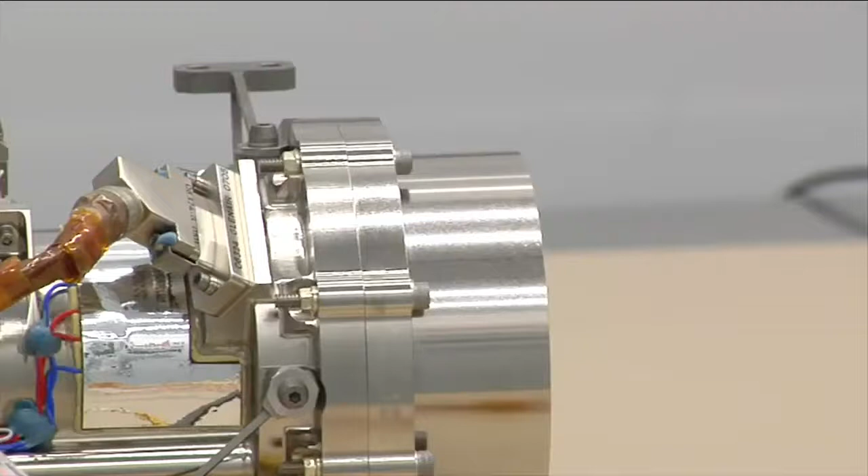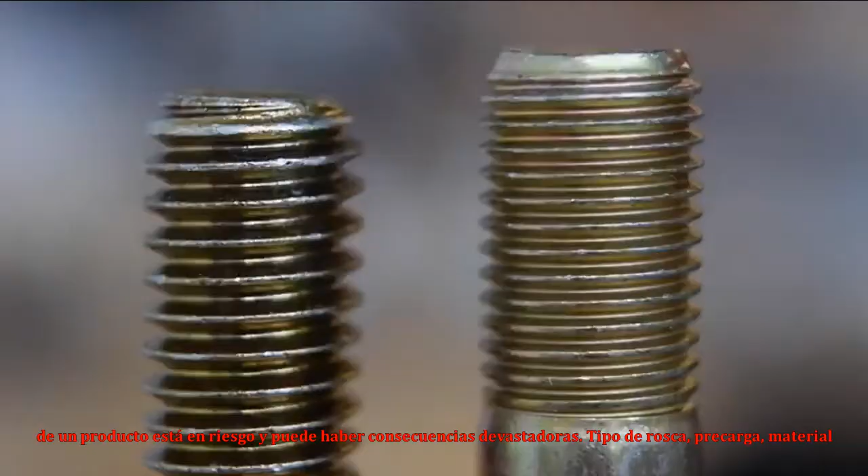Fasteners are some of the most important components in any machine, but they're often taken for granted. It's vital to correctly choose and use them, or else the mechanical integrity of a product is at risk, and there can be devastating consequences. Thread type, preload, material choice, coating spec, drive selection, and more all need to be understood and applied properly. In this video, we're going to go over all these fastener topics and many more, so that you know the nuts and bolts of nuts and bolts.

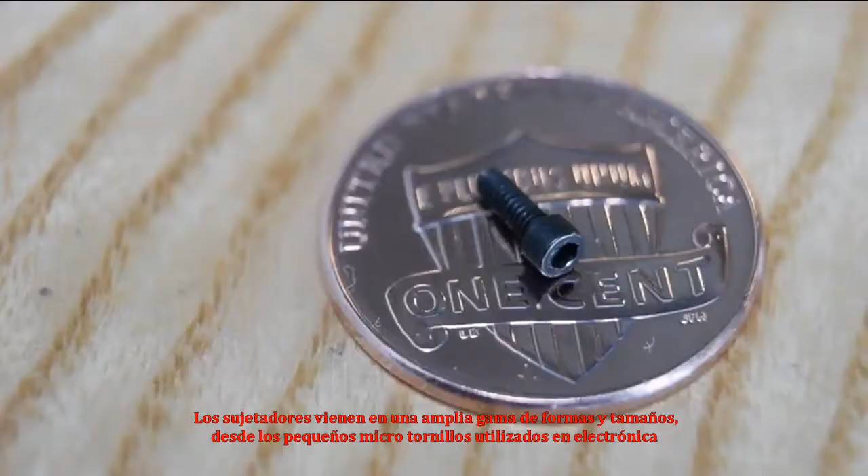Fasteners come in a wide range of shapes and sizes, from the tiny microscrews used in electronics to the large structural bolts that hold buildings together. The vast variety available can be a bit overwhelming, but we'll show you a few of the most common types and talk about where they're best used.

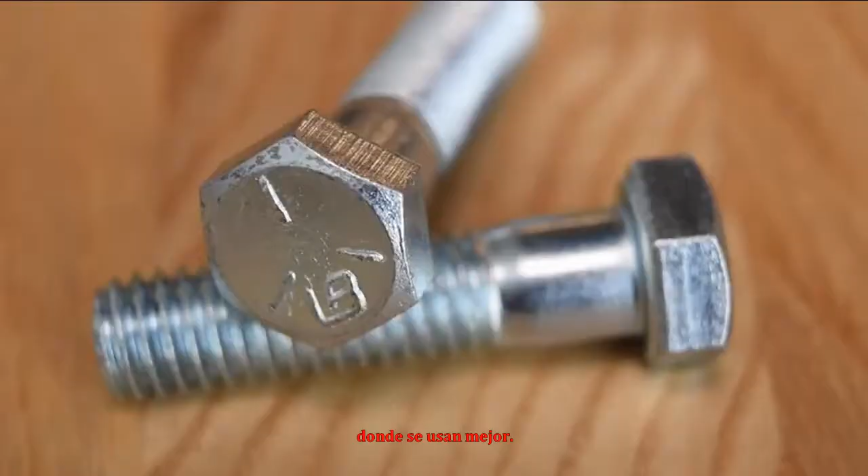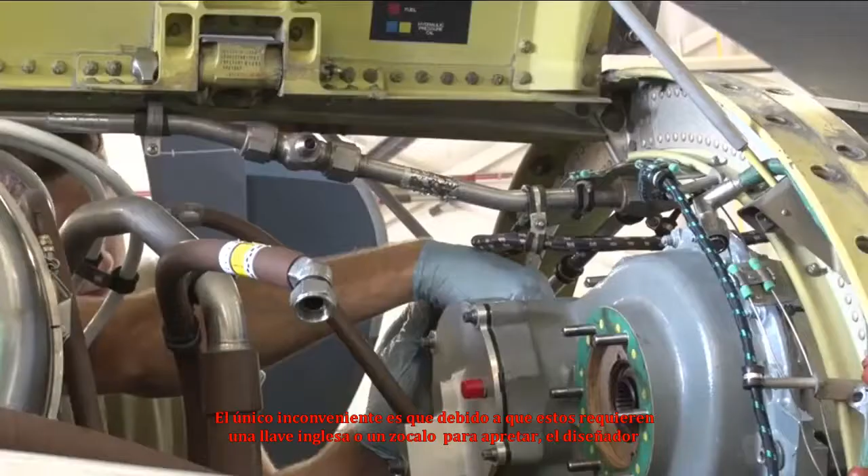These are hex head screws, which most people informally call bolts. Because they're cheap, strong, and easy to work with, they're probably the most common fasteners you'll encounter. The only trade-off is that because these require a wrench or socket to tighten, the designer has to leave a fair amount of room around the fastener to accommodate the tool. If you're designing with these, you can reference Machinery's Handbook for a helpful table on tool clearance requirements.

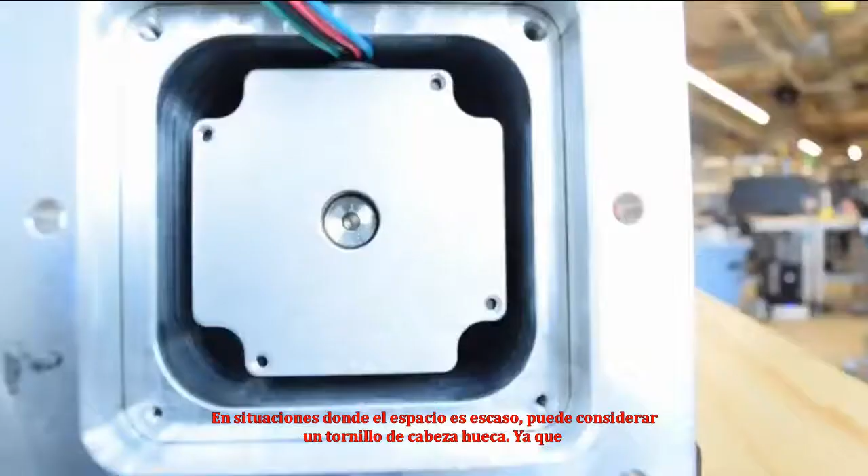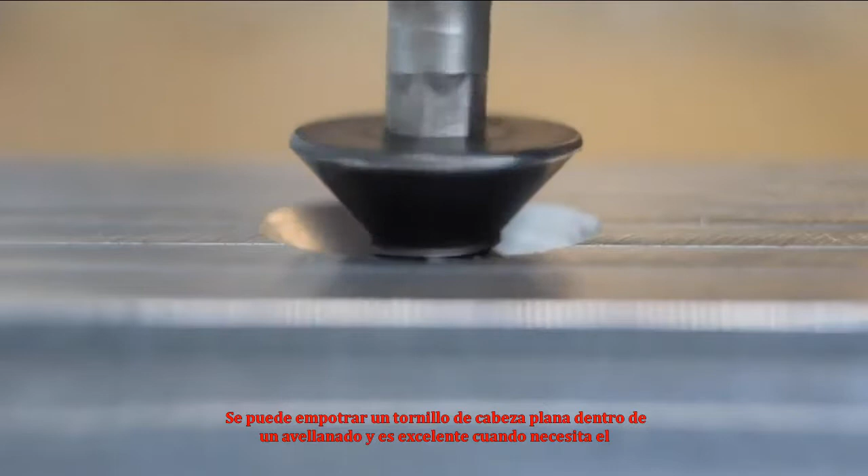In situations where space is at a premium, you might consider a socket head screw. Since they're driven from the top, you can place them in tight spots or bury them in a counterbore. Low head screws and button heads have a lower profile and are often used in electronics. A flat head screw can be recessed inside a countersink and is great when you need the head of the fastener to sit below the surface of thinner materials.

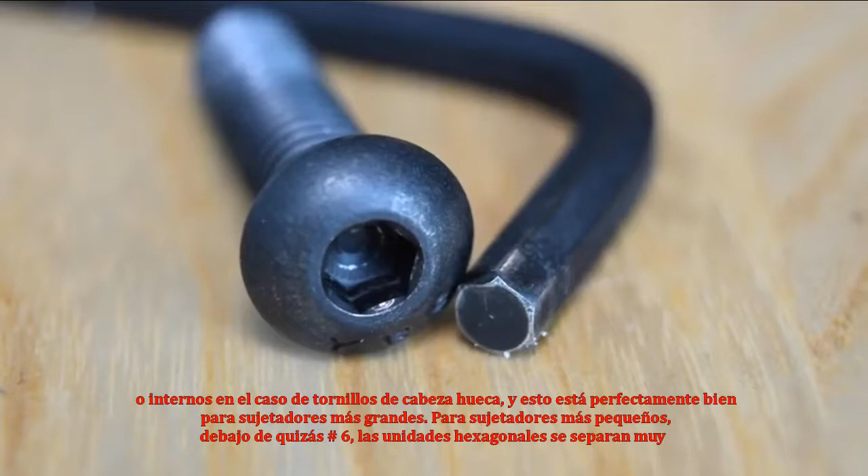Screws are most commonly sold with a hex drive, either external in the case of a hex head cap screw, or internal in the case of socket head cap screws, and this is perfectly fine for larger fasteners. But for smaller fasteners, below maybe a number 6, hex drives strip out very easily, and you should consider a more robust drive like Torx.

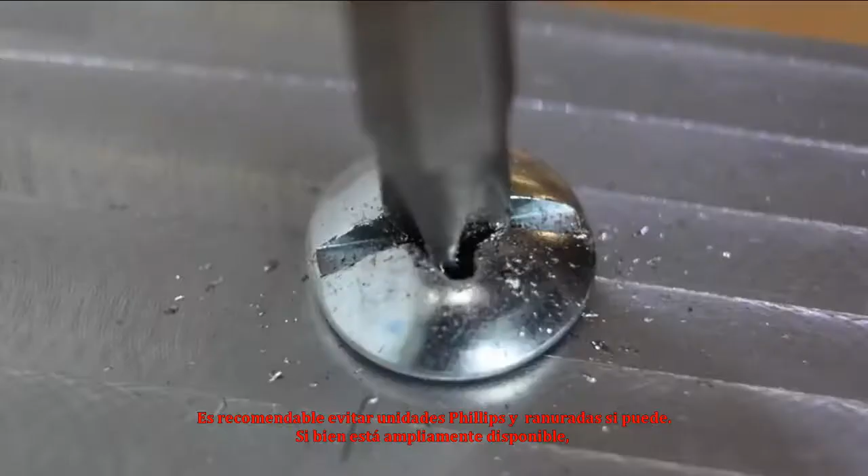High-strength nuts and screws are sometimes manufactured with an external 12-point drive, which offers more points of contact than the traditional 6-point hex. It's best to avoid Phillips and slotted drives if you can. While being widely available, they are subject to cam out and can strip easily. Even the construction industry is moving to Torx drive because of the many advantages. There's also a lot of really oddball drive types that were designed for very specific applications or to purposely be obscure. Unless your design fits into these categories, you should probably consider something more mainstream.

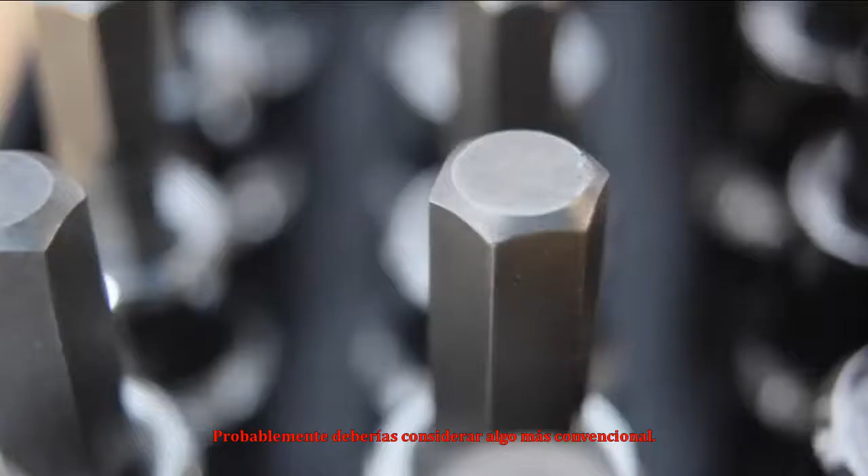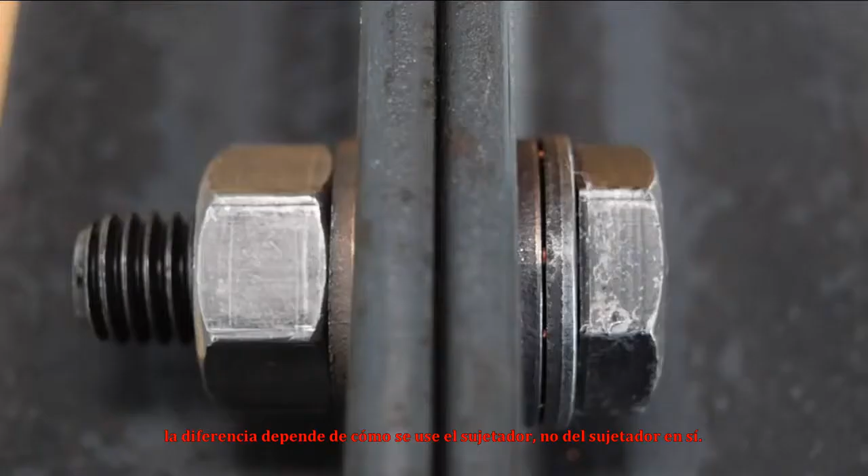You may be wondering what the difference is between a screw and a bolt. Technically, the difference depends on how the fastener is used, not the actual fastener itself. Bolts are used with through holes and are fastened with a nut. Screws are used in tapped holes. Screws have a design for assembly advantage since the technician only needs to use a single tool to fasten the joint.

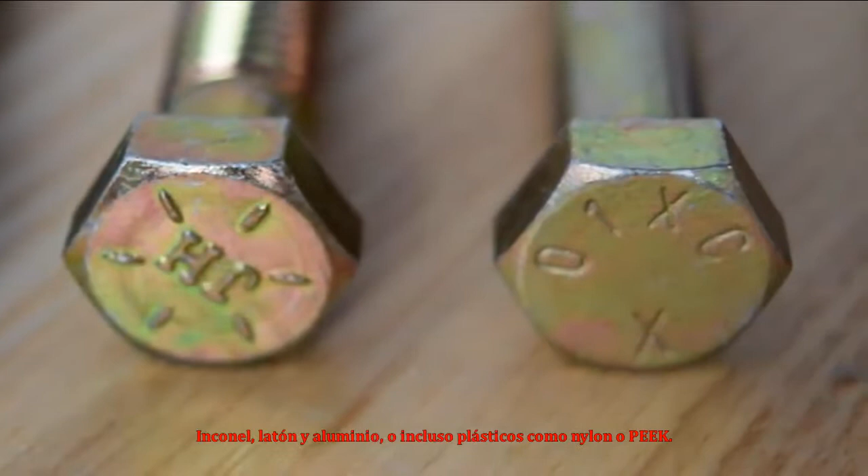Screws are most commonly made from either low carbon or alloy steel, but you will also find them made from stainless steel, titanium, Inconel, brass, and aluminum, or even plastics like nylon or PEEK. The primary considerations for selecting material is strength and corrosion resistance. The strongest fasteners are usually made from heat-treated alloy steel, but steel will corrode when exposed to moisture.

Coatings are commonly applied to alloy steel fasteners to make them more resistant to corrosion. Zinc plating is economical and is the most common coating on low and medium strength fasteners. It is sufficient for dry environments that receive only occasional contact with moisture. Grade 8 screws usually receive a yellowish chromate conversion coating, which has slightly better corrosion resistance than electroplated zinc.

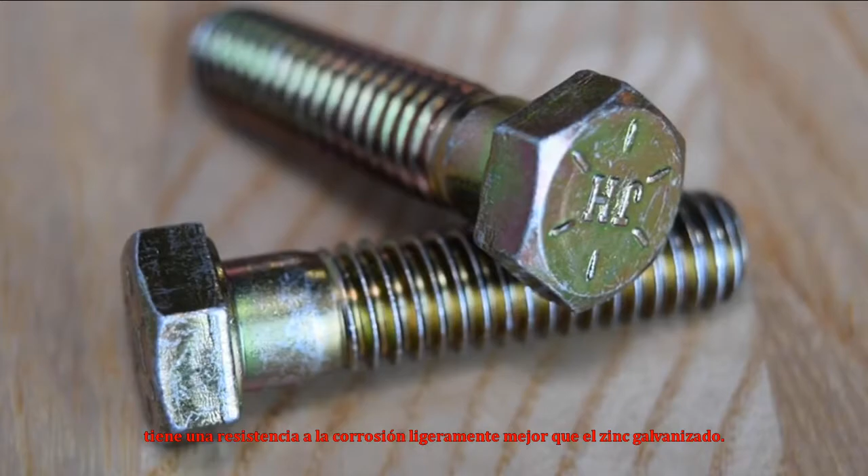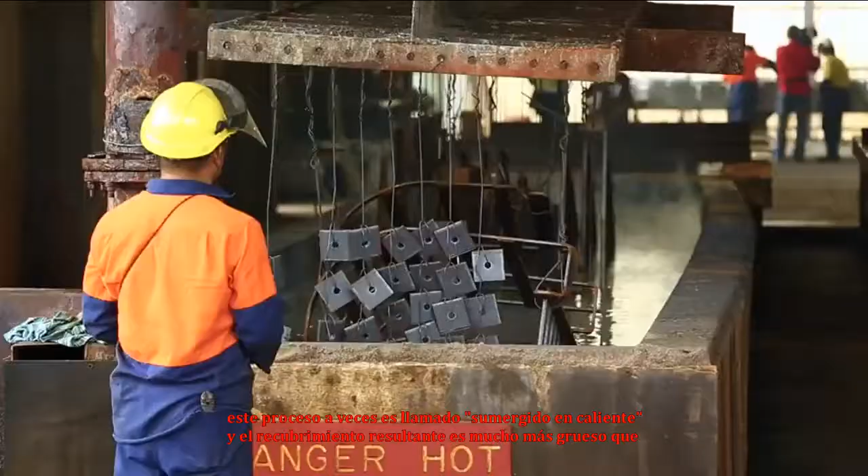Fasteners that will be exposed to the elements are often galvanized. This means that the raw bolt is dipped in a pot of molten zinc, which adheres to the base metal. This process is sometimes nicknamed hot dipped, and the resulting coating is much thicker than the electroplated zinc. Galvanized fasteners are typically acceptable for exterior installations.

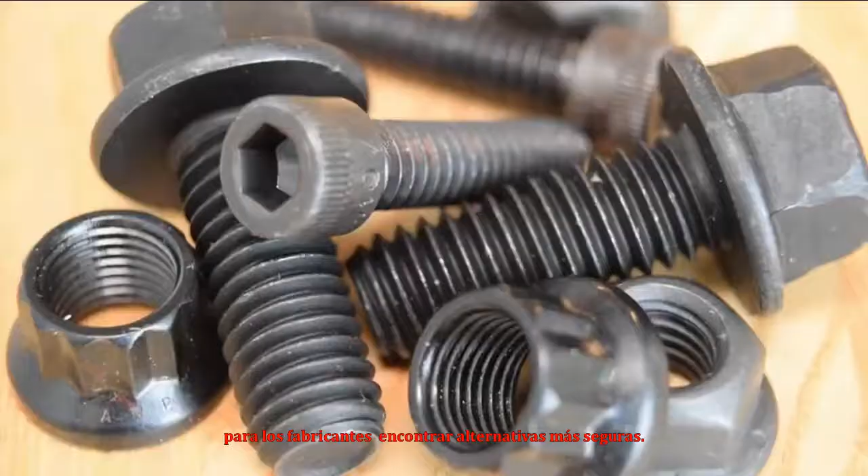Aerospace fasteners are usually plated with cadmium. This is a very effective coating, but cadmium is an extraordinarily dangerous material, and these hazards are compelling manufacturers to find safer alternatives. Some fasteners, particularly socket-head cap screws, are coated with black oxide, and while it looks nice, this doesn't significantly improve the corrosion resistance over bare steel.

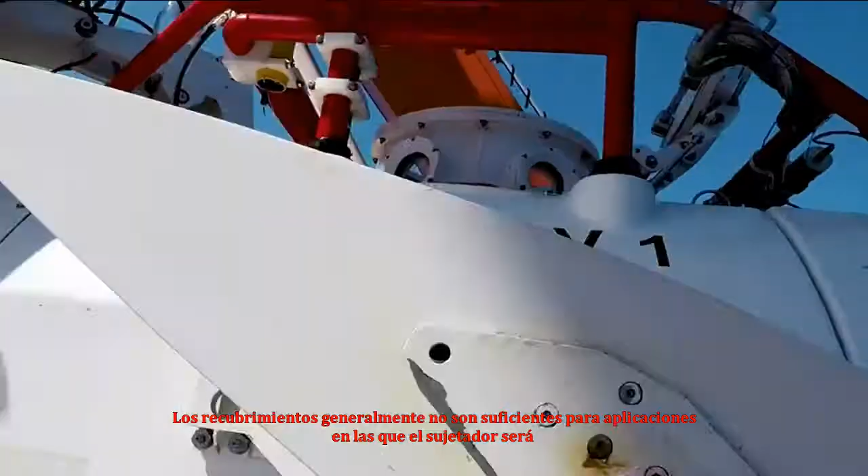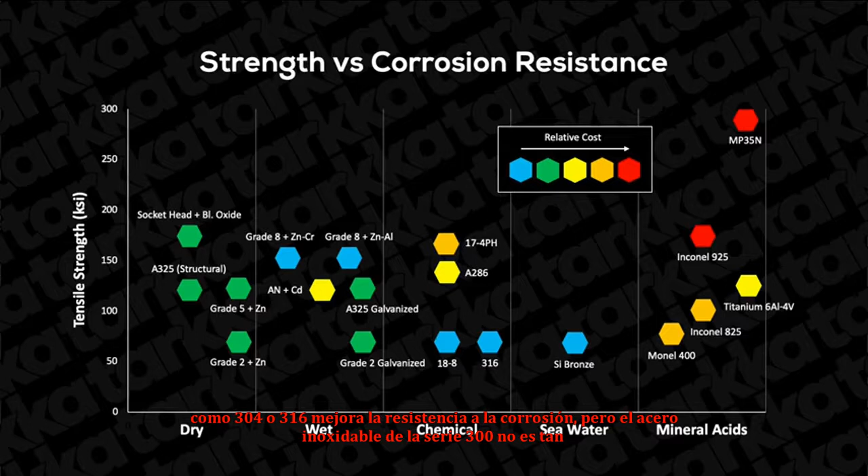Coatings are generally not sufficient for applications in which the fastener will be immersed for extended periods. Switching to a stainless steel fastener made from an alloy like 304 or 316 improves the corrosion resistance, but 300 series stainless is not nearly as strong as alloy steel. If you need both high strength and corrosion resistance, you may need to use a super alloy like A286 or 17-4PH. Nickel-based alloys like Inconel and Hastelloy are also used in the most demanding applications.

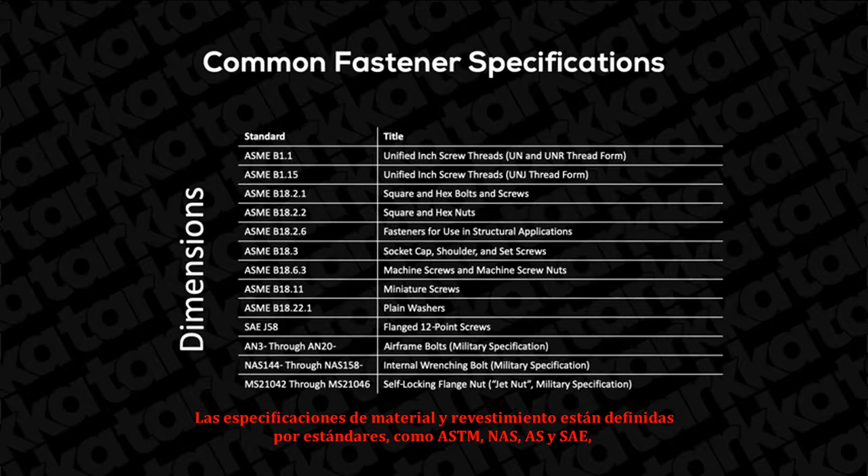Material and coating specifications are defined by standards, such as ASTM, NAS, AS, and SAE, or the former MIL and AN specs. Metric fasteners are defined by ISO or DIN specifications. Various grades of fasteners are sometimes defined by the standards, and for hex head screws, the grade is usually designated by marks on the heads. Metric fasteners use a system of numbers stamped into the head. In either case, the higher the grade, the higher the tensile strength of the fastener.

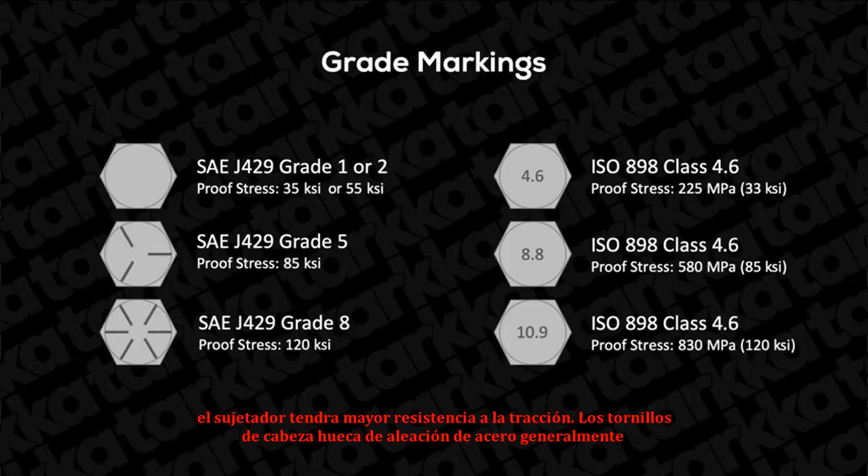Alloy steel socket-head cap screws generally have a strength similar to grade 8 bolts. It is important to ensure that the fasteners you are purchasing conform to the required specifications for your product or industry.

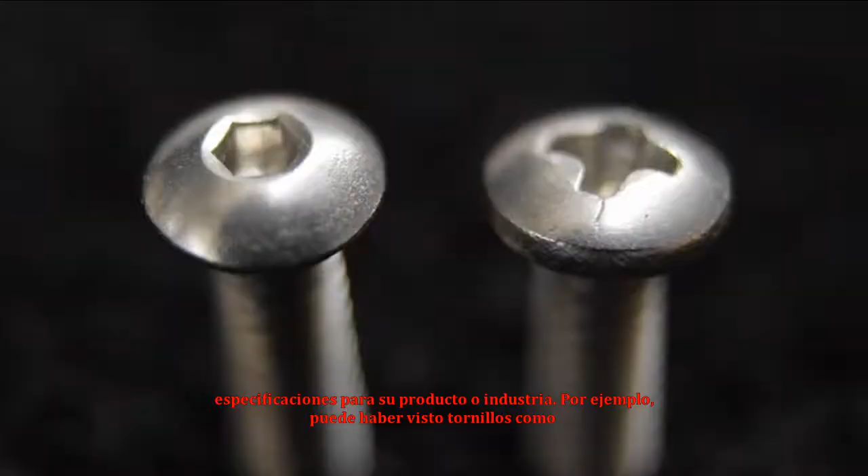For example, you may have seen screws like this at the hardware store, where they are typically labeled as panhead screws.

Dimensionally, they are very similar to buttonhead screws, and both are made from steel and zinc plated. However, the hardware store screws are made from soft carbon steel, while the buttonheads are made from heat-treated alloy steel per an ASTM specification and are over three times as strong. For some projects, hardware store fasteners are fine, but for critical applications, purchase fasteners from a company like McMaster-Carr that lists exactly what specifications they conform to.

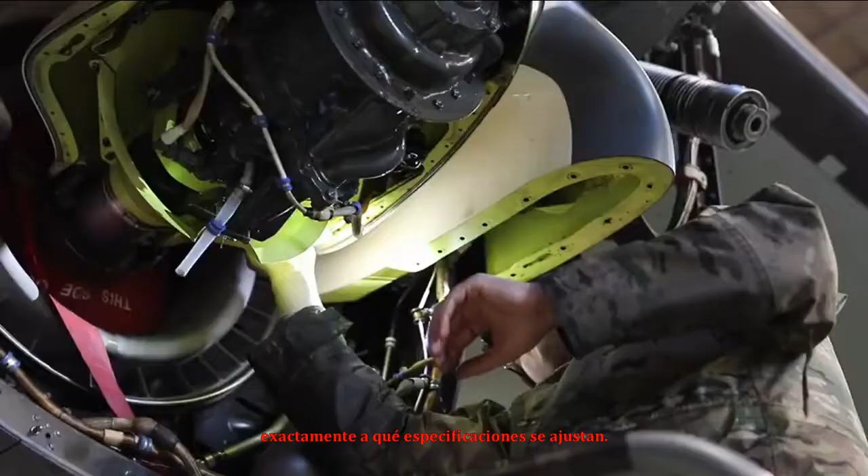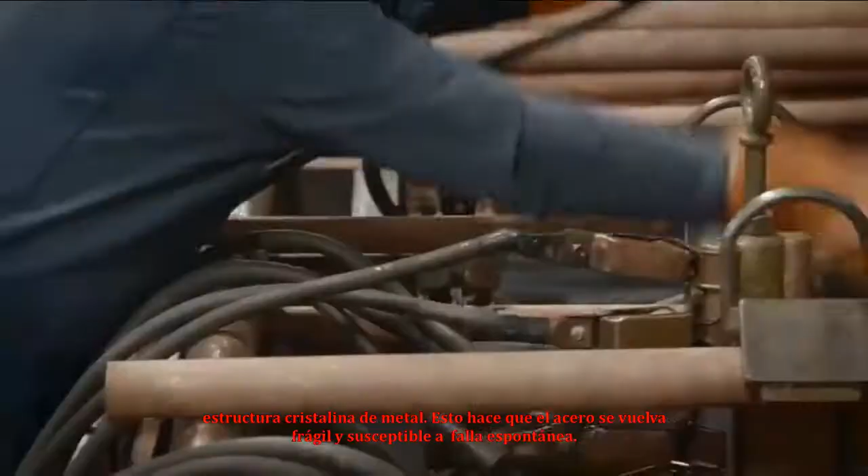Fastener materials and coatings is a hugely important area, especially in industries like aerospace, marine, and energy. A particular point of concern is hydrogen embrittlement. During the plating process, hydrogen is often produced, which can become trapped inside the metal's crystal structure. This causes the steel to become brittle and susceptible to spontaneous failure. There was a rush of aviation accidents that occurred when MS jet nuts that had hydrogen embrittlement failed in service.

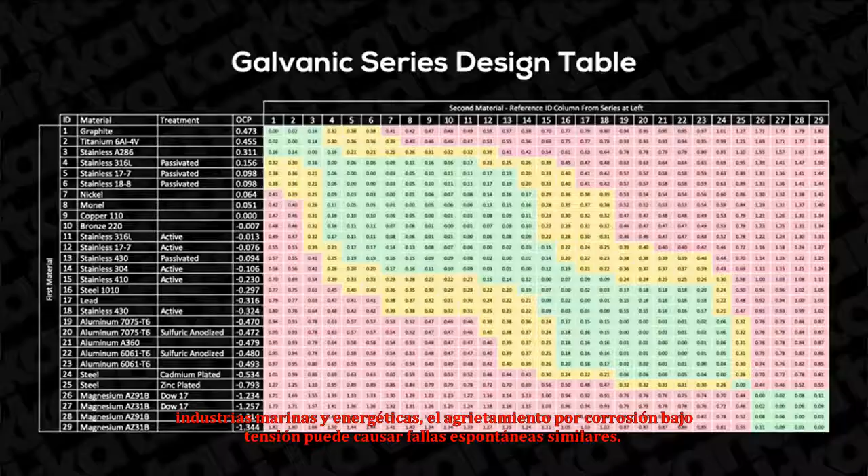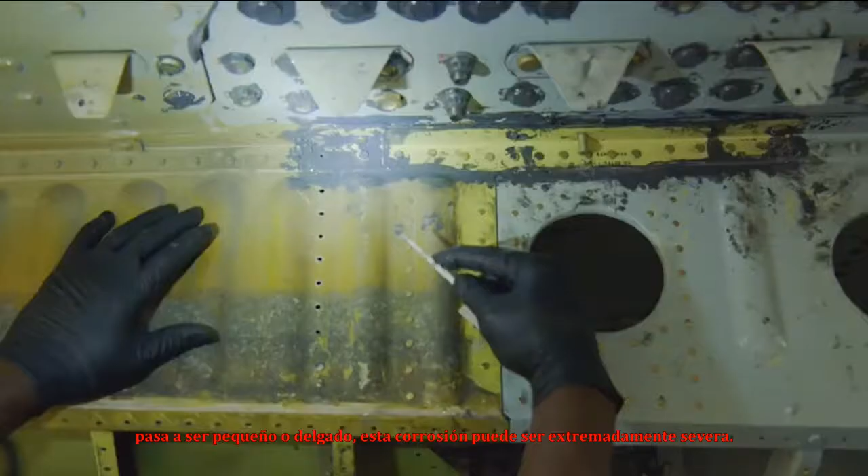In the corrosive environments common in the marine and energy industries, stress corrosion cracking can cause similar spontaneous failures. Another consideration is galvanic corrosion. When materials that are far apart on the galvanic series are in contact and in the presence of an electrolyte, a galvanic cell is formed. In this case, accelerated corrosion occurs on the more anodic material. If the anodic material happens to be small or thin, this corrosion can be extremely severe.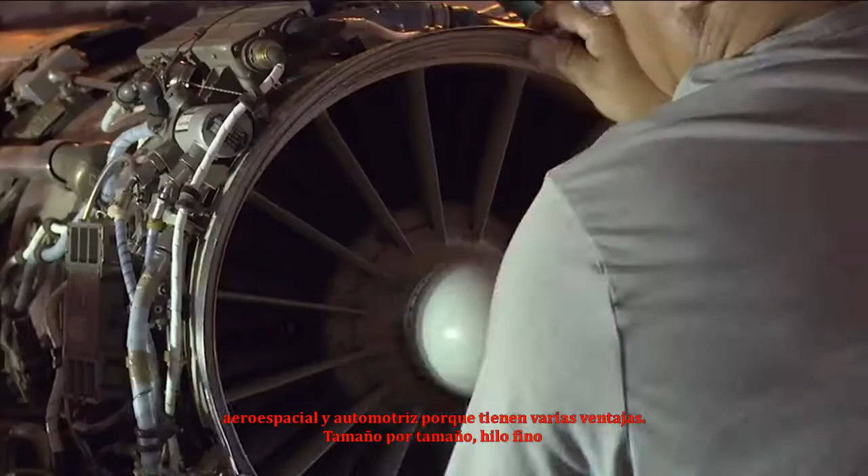Fasteners are available in both coarse and fine threads. Coarse thread fasteners, conforming to the UNC thread specification, have fewer threads per inch and are generally the first choice. However, fine thread fasteners are used in high-performance applications like aerospace and automotive because they have several advantages. Size for size, fine thread bolts are about 10% stronger than coarse thread bolts, and the lower helix angle makes them more resistant to vibration. However, they are easier to cross-thread and don't tolerate debris or thread damage very well.

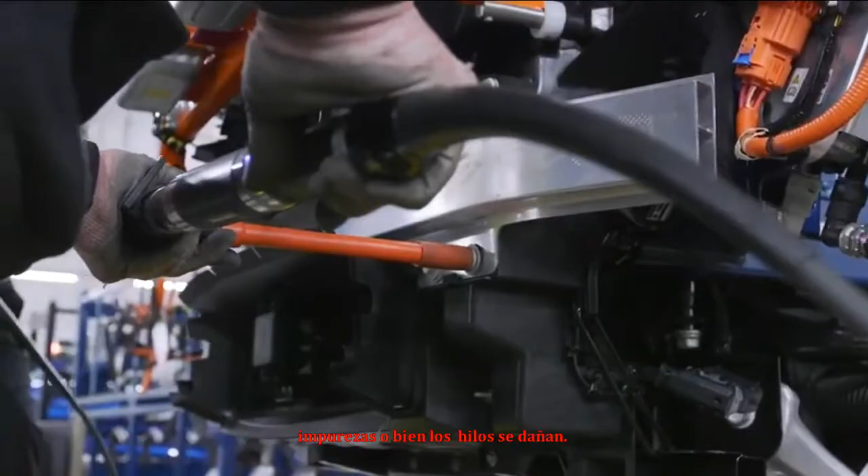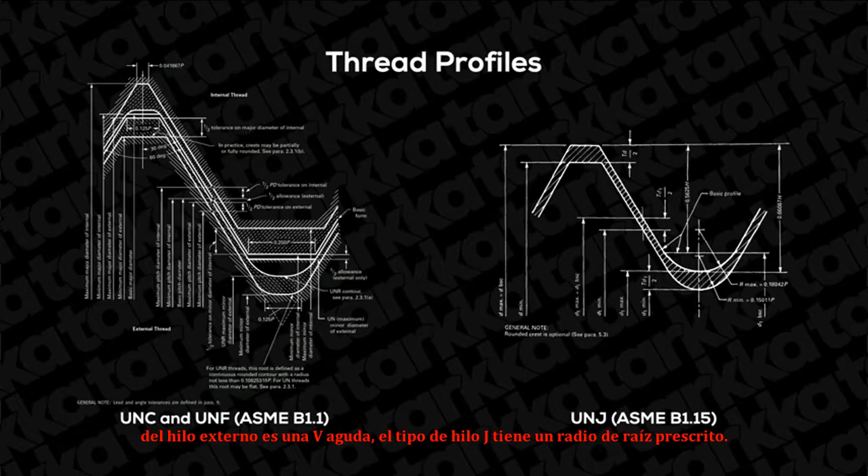A slight variation to the UNF and UNC standards is the J-type thread. Instead of the root of the external thread being a sharp V, the J thread has a prescribed root radius. The radius helps improve fatigue performance for cyclically loaded screws. You typically only see this type of thread in aerospace.

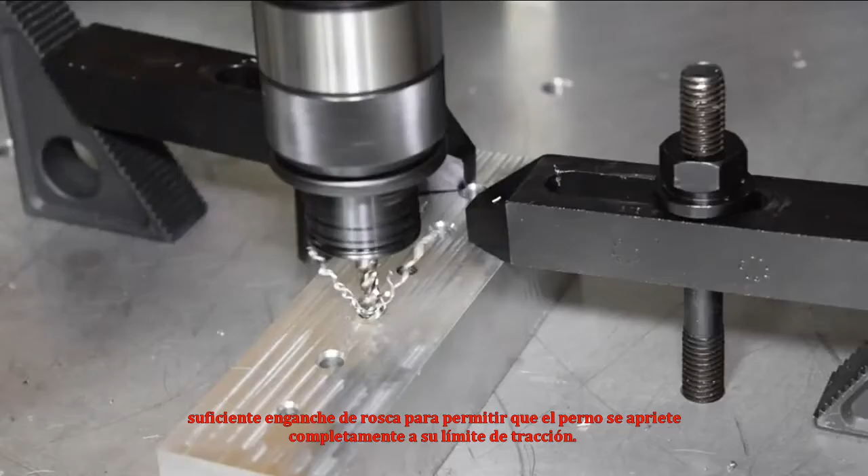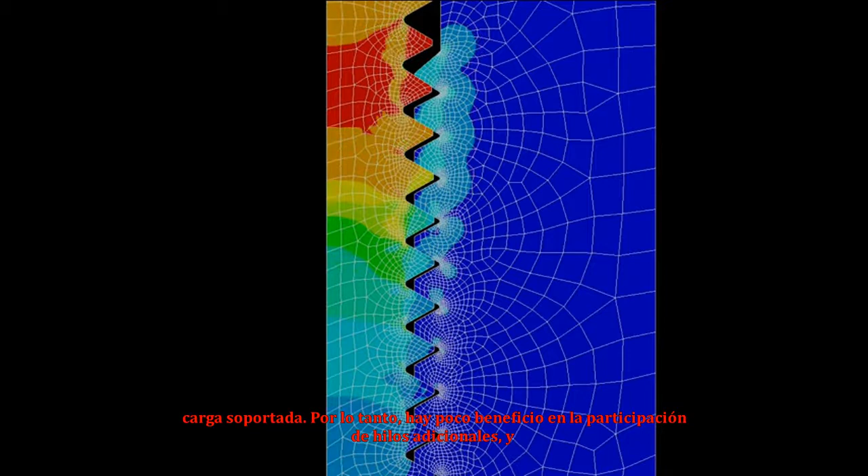When designing tapped holes, you need to have enough thread engagement to allow the bolt to be fully tightened to its tensile limit. For threads in most metals, a thread engagement length of around two times the nominal size of the screw is sufficient. An interesting nuance of threaded holes is that they don't share the tensile load evenly along their length. In this FEA, we're simulating tightening a steel screw into an aluminum tapped hole, and you can see that the first few threads do almost all the work. Once you get beyond about the 8th thread, there is almost no load being carried. Hence, there is little benefit to additional thread engagement, and it simply adds to the assembly time.

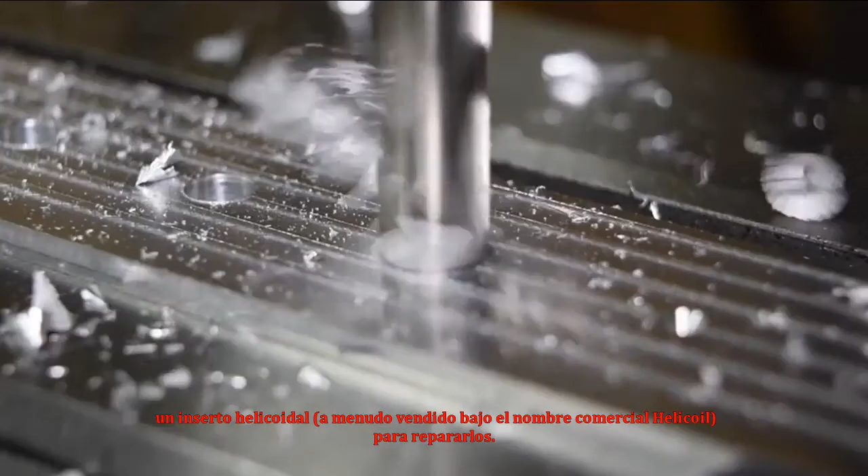If the tap threads in a workpiece ever become damaged, you can use a component called a helical insert, often sold under the trade name Helicoil, to repair them. You drill out the original thread with a drill that's slightly larger than the major diameter, and use a special tap to cut new threads. Then, you install the insert with a threaded mandrel and break off the tang at the bottom. Sometimes, people will install helicoils in brand new parts, especially those made of soft materials like aluminum or magnesium. This won't necessarily make the thread any stronger, but it will make it a lot more durable if you'll be removing and replacing the fastener frequently.

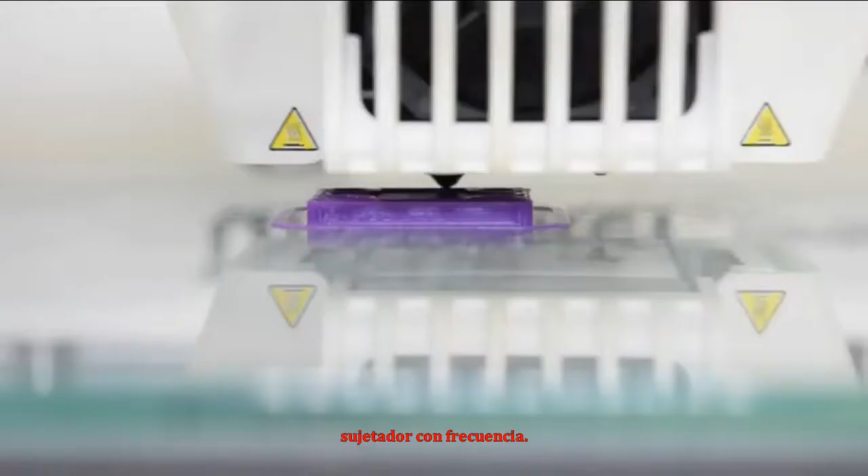If you need to thread machine screws into plastic, especially 3D printed parts, heat set inserts create a strong, durable thread. There's typically a special tip that you install on a standard soldering iron, which slips inside the insert and allows you to press it into the plastic.

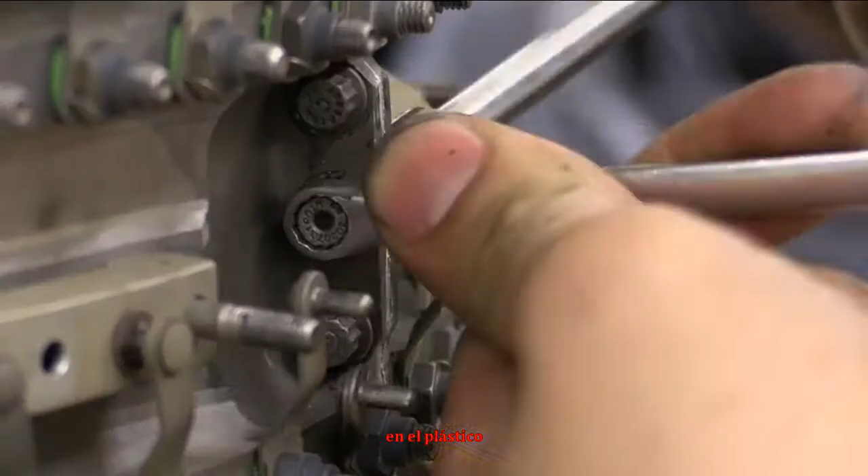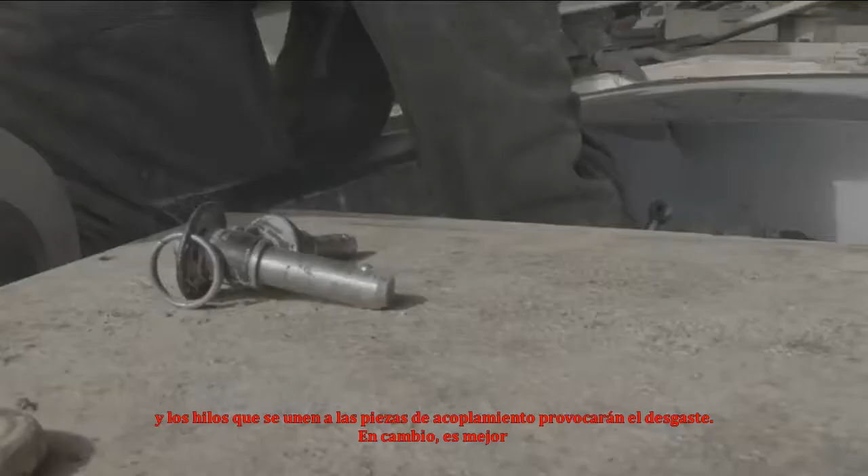You should do your absolute best to avoid subjecting screw threads to significant shear loads. The decreased area at the root of the thread makes this the weak part of the fastener, and the threads bearing on the mating pieces will lead to fretting. Instead, it's best to transmit shear loads with dowel pins or shear bosses. But if you look at any building built from steel, you'll find thousands of fasteners in shear. Why is it okay there? Structural bolts have an unthreaded section of a controlled length that acts as a dowel. The shearing plane intersects with this dowel section instead of the screw threads, creating a very simple but sound connection.

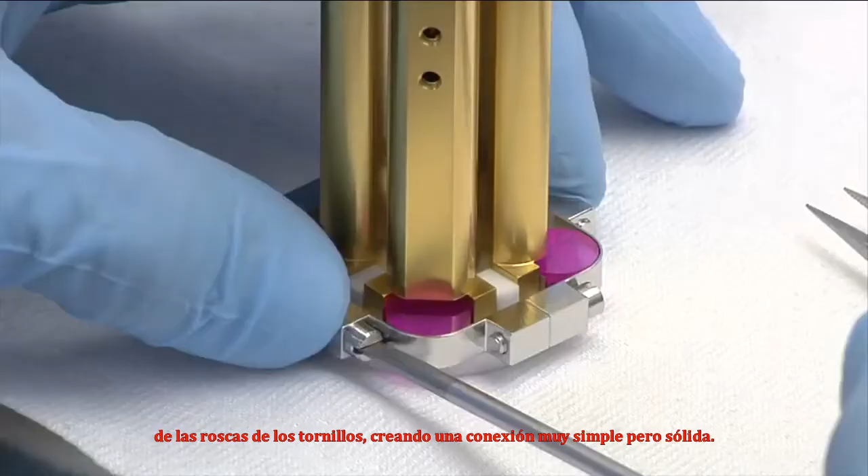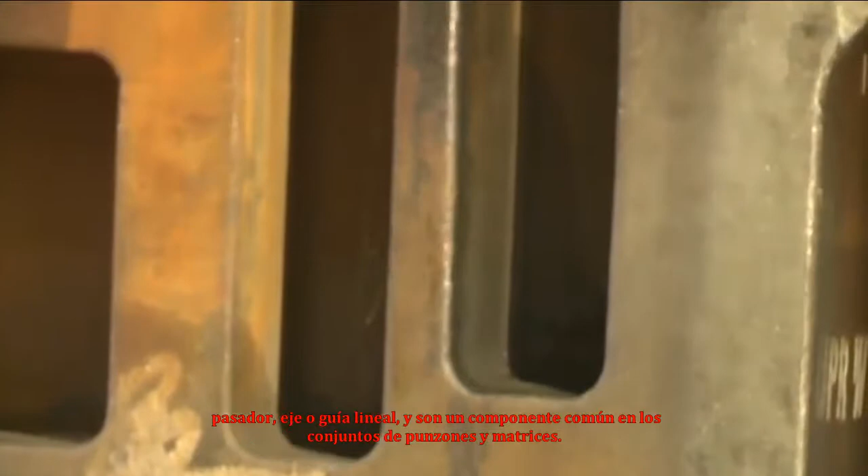In cases where you need a fastener to also precisely align components, you might consider a shoulder screw. They have a precision ground shank under the head that can be used as a pin, shaft, or linear guide, and they're a common component in punch and die assemblies. Shoulder screws usually have a much smaller threaded section than other screws, so you can't use them to generate a lot of clamping force.

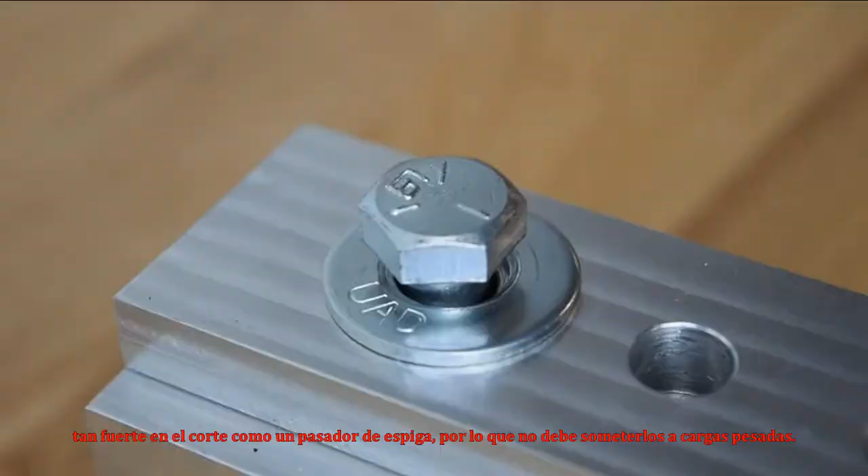Also note that they're not nearly as strong in shear as a dowel pin, so you shouldn't subject them to heavy loads. Washers are used to help spread the bearing stress of bolts and nuts over a wider area. This is important if you have a loose clearance hole where only a small portion of the bolt head would be in contact with the joint members.

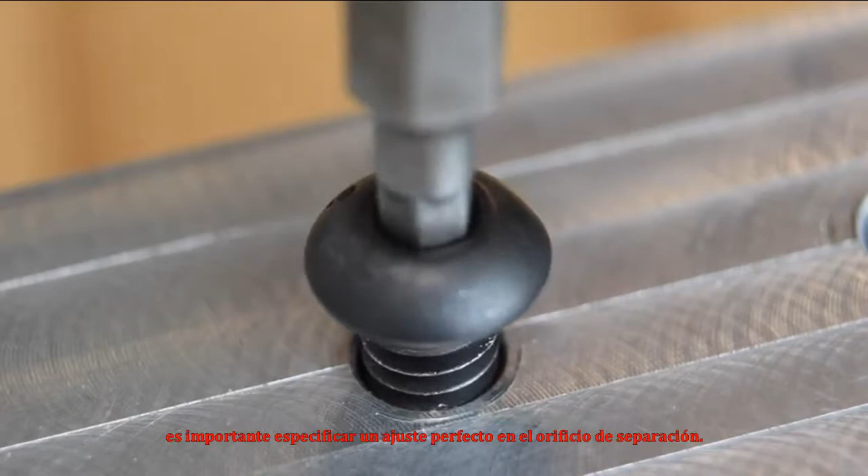Washers also reduce marring of the parts and make torque values more reliable. It's generally best practice to use a washer under the head of a hex head screw as well as the nut. Washers are not often used on socket head cap screws, but to get away with this, it's important to specify a close fit on the clearance hole. An alternative to a free washer is a flanged screw or nut. These are preferred on mass-produced products to eliminate the handling time of a separate washer.

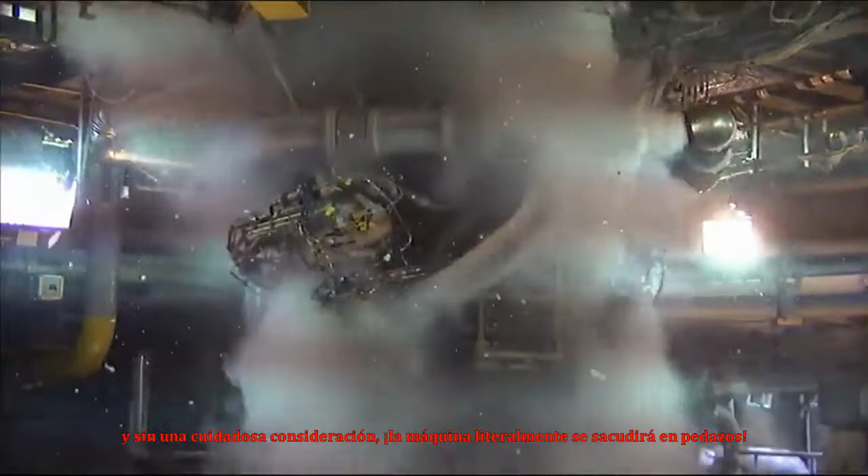In practice, vibration is the biggest problem for bolted connections in machines and vehicles, and without careful consideration, the machine will literally shake itself to pieces. Applying the proper preload goes a huge way in improving the resistance to vibration. The general guideline is to apply between 75 and 90% of the bolt's proof load as a preload for static joints.

Preload is usually controlled by the applied torque. The only trouble with this method is that most of the applied torque is lost due to friction in the threads and between the head of the screw and the workpiece. The materials, coatings, and lubricants all play a role, and a correction factor, called the K-factor, is used in the torque formula to account for this. However, even when the K-factor is chosen correctly, the torque method is only accurate to within plus or minus 25%.

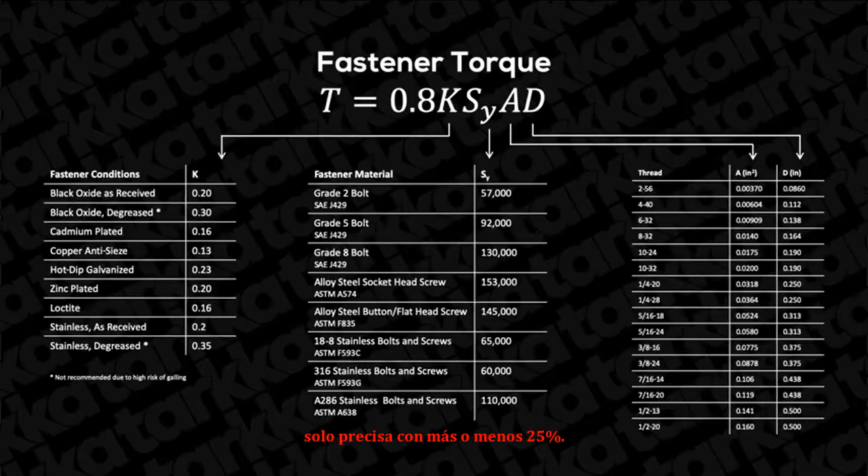For statically loaded joints, there's no reason not to apply the maximum preload to the fastener. However, if a joint is loaded cyclically, the fastener may be subject to fatigue, and the preload and fastener material may need to be adjusted to account for the cyclic stress.

Another closely related parameter is the grip length of the screw. This is the distance between the head of the bolt and the start of the thread engagement, and the longer this distance is, the more resistant the screw will be to loosening.

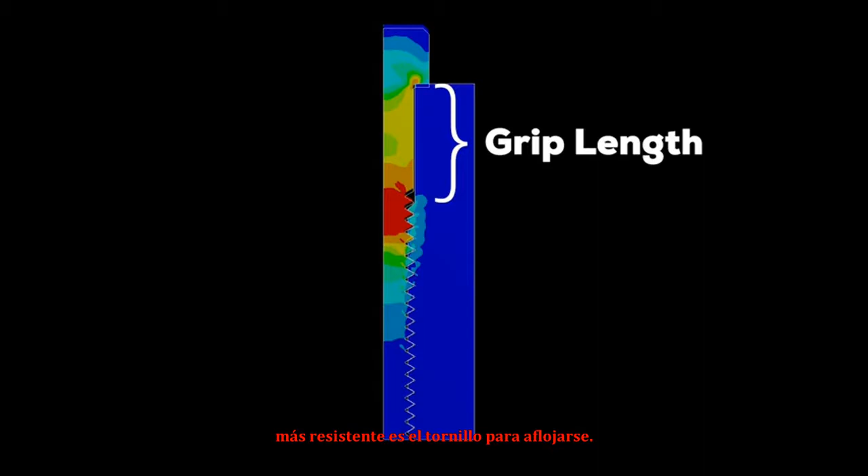Sometimes preload is not enough to prevent a fastener from loosening, and additional provisions must be made. For bolted connections, lock nuts are extremely effective. The most basic style has a nylon element that is deformed by the screw threads and holds the two together. These are called nylocks. In applications subject to higher temperatures above about 250 degrees F, the nylon element will soften and not be effective.

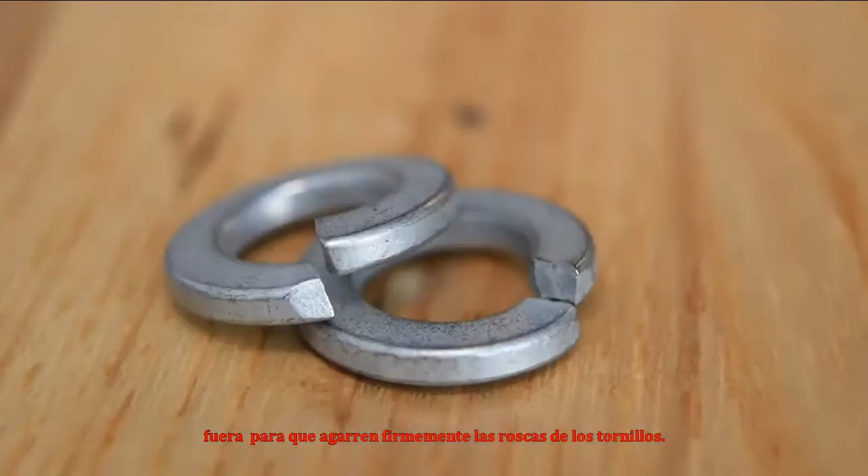Instead, deformed thread lock nuts are used. These come in a few different styles, but in all cases, the threads are specifically made slightly out of round so that they tightly grip the screw threads. You may have seen these split lock washers at the hardware store. They don't do anything and really have no place in engineering applications. There are, however, other washer designs that are quite effective.

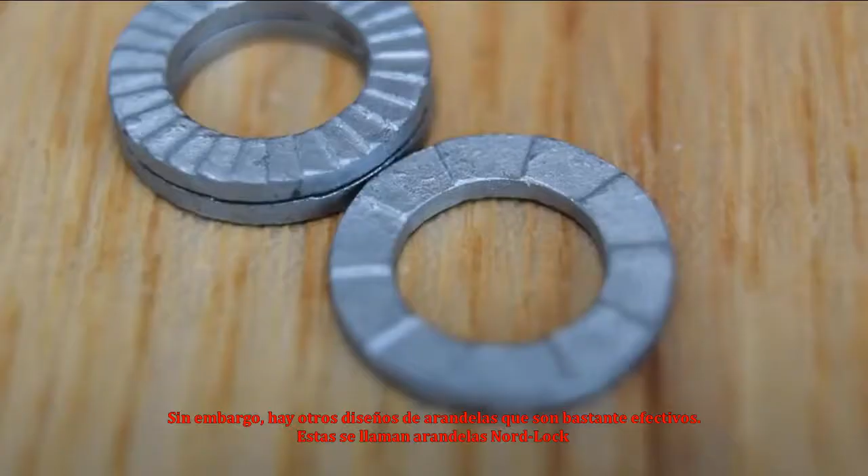These are called Nord-Lock washers, and they come as a two-piece assembly that is glued together. An interlocking wedge feature causes the two washers to separate as the screw is loosened, which actually increases the tensile load in the fastener. Liquid thread lockers like Loctite are another good option.

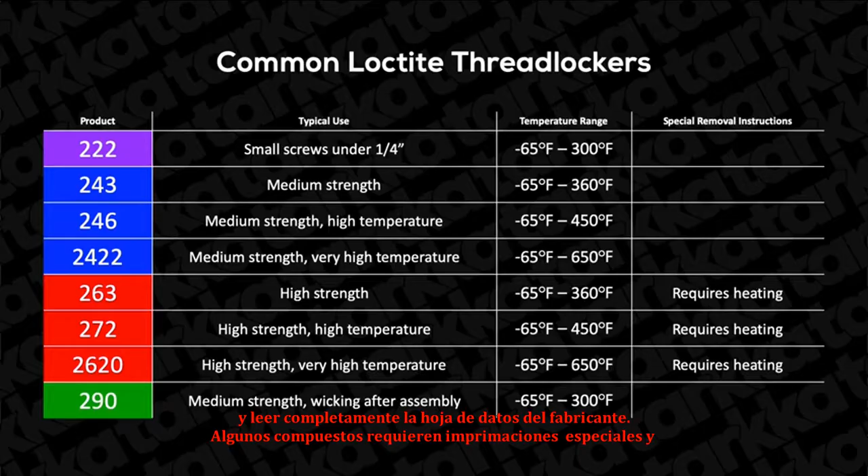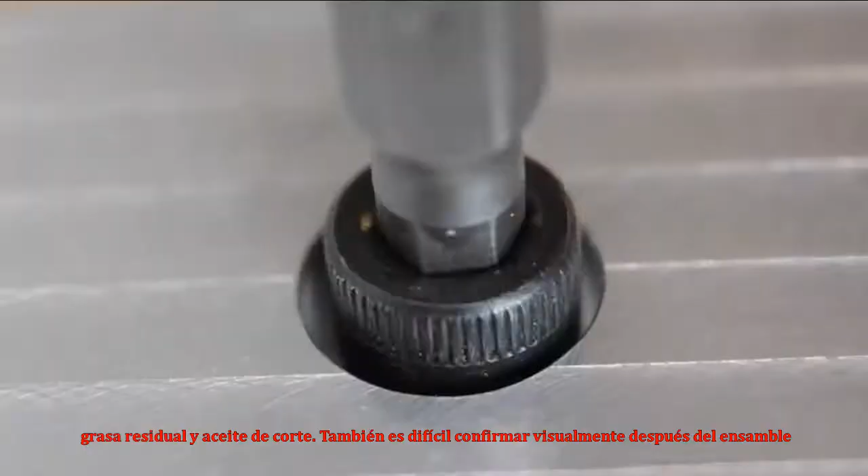There are scores of formulations on the market that are designed for different holding strengths, operating temperatures, materials, and thread sizes. It's important to select the correct formula for your application and fully read the manufacturer's datasheet. Some compounds require special primers and curing procedures or only work properly for certain sized fasteners. Loctite works extremely well on clean parts and screws, but it's somewhat sensitive to residual grease and cutting oil. It's also difficult to visually confirm after assembly that it has been applied correctly or even at all.

Mass-produced products often use fasteners with a nylon patch that is pre-applied to the threads. This isn't as effective as Loctite, but it is a lot faster to assemble. There are also proprietary taps that cut a special thread form that is compatible with standard fasteners. The modified thread geometry creates a locking effect that makes the fastener more difficult to remove.

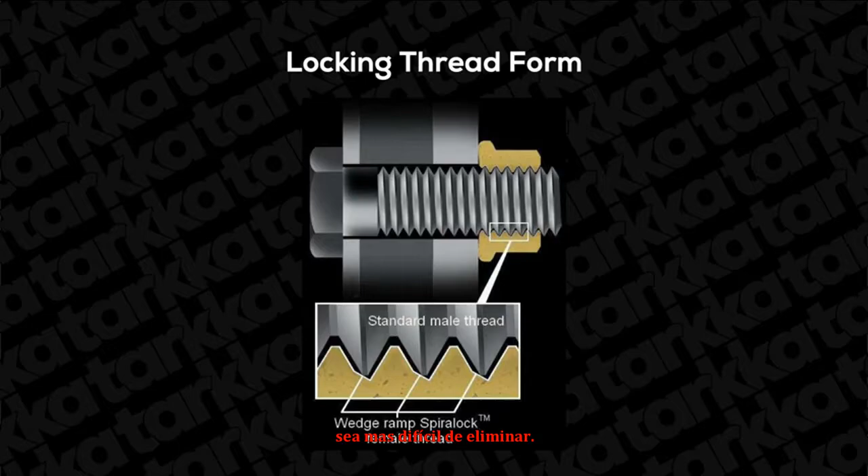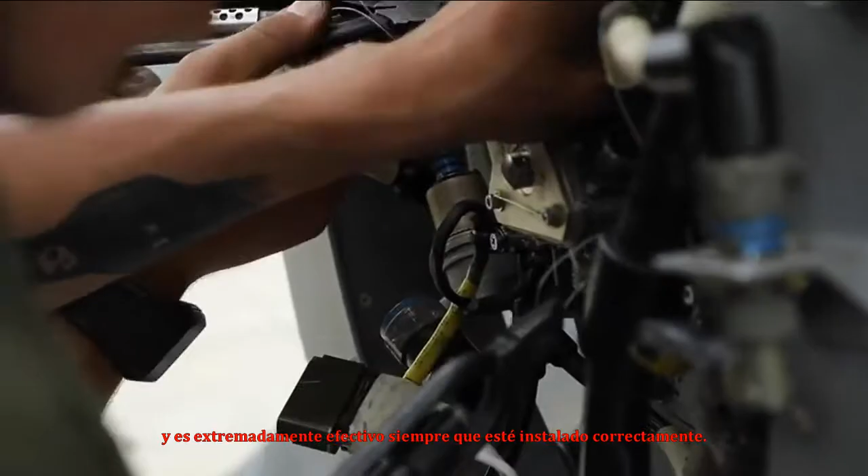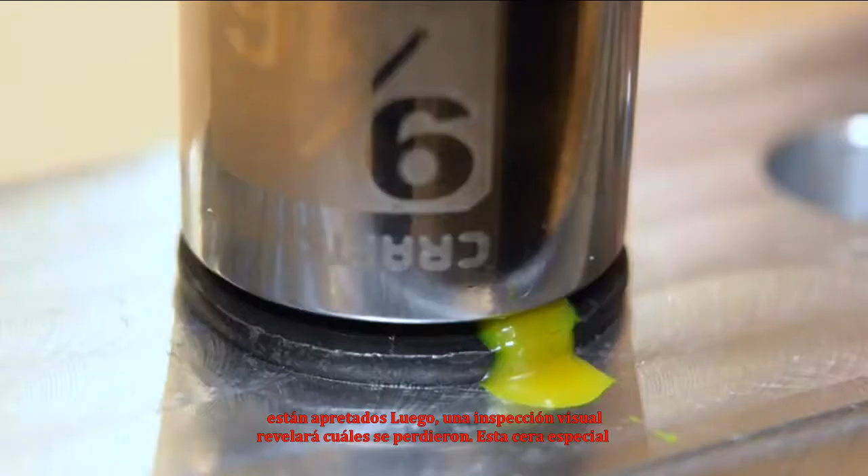When all else fails, the most effective way to prevent loosening is to physically prevent the fastener from turning after it's tightened. Aircraft mechanics use safety wire for this, and it's extremely effective as long as it's installed properly. One thing to watch out for is that a fastener that has been properly torqued looks the same as one that's only finger tight. A good practice is to mark the fasteners one by one as they are torqued. Then, a visual inspection will reveal which ones were missed. This special marking wax makes it clear when a fastener has been loosened, either by a person or by vibration.